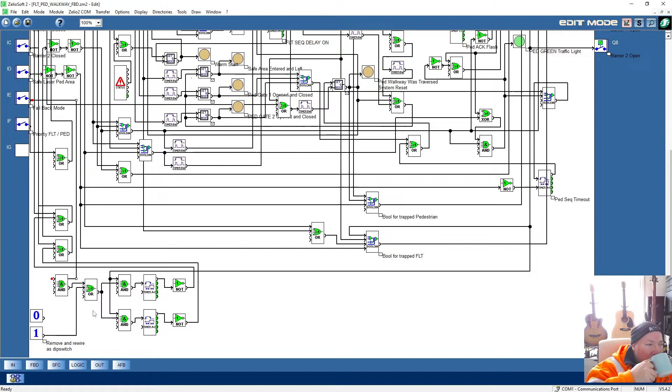Right, you ought to have a pill to make your brain work. I'm on statins and all sorts of stuff, so that's probably why my bloody brain's not working. They say it causes memory loss and all sorts. Oh well, what can you do?

Try harder, I suppose. I've just found one of my circuit boards. Right, anyway, leave that alone. Right, oh my god, let's get on with it. Let's get on with it. Bloody hell, get this done out of the way. Crikey. Anyway, so I need to override.

I need to switch the override on, but this switch needs to switch this on. So that or that, yeah. So let's take this off out of here. Unwire this AND gate, AND gate there. Put the switch into here.

Oh, I can't get it now. Hang on. Switch into there, that or that. And put that one back to there.

Right, so I've got this. Got the switch coming down to this OR gate. So if that switch is on or this is on, that's right. That's better, it gives me an OR gate. Right, so that'll do that bit, that'll do that bit.

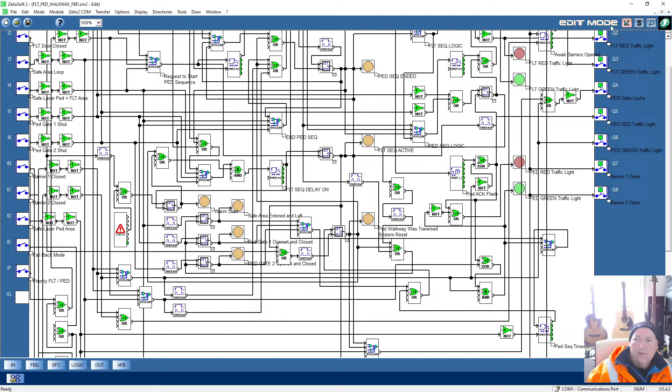So we've got to somehow override. Yeah, so we need to override them from our switch, from our fallback mode switch. Now let's just simulate again, let's find out what this is doing. So our simulator is allowing it to function without an input, but when we do have an input, it's a problem.

So we need to cut the signals off. So if we do that... right, the signals are going straight through. Right, I got you - so they're coming through an OR gate. Yeah, there's two OR gates, and it's coming through from there. They're both on from this at the minute. So we need to cut that signal off.

So how are we cutting this one off? We're sending the FLT door down here. Let's turn it off a minute. So the FLT door is coming down here to this one, and it's going straight back up again. Right, because then that's okay, because it doesn't matter if it's on or off, because this one is sending the signal based on this override here. So can we do the same thing?

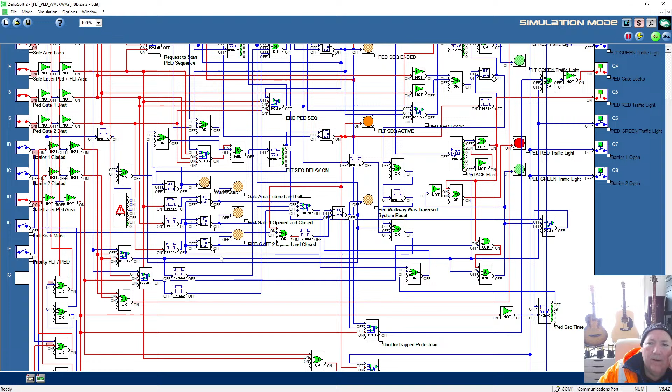Let's shut these up. Right, so it's going to go over to FLT mode. So your outputs are on and you're off here. So you're off, so it thinks the barrier's open.

Yeah, it's simulating it. But if you command press this on, it goes through and upsets the system. We don't need to upset the system. So we need to break those.

So we need to do this: when this fallback mode is on, it needs to cut this off. It needs to cut them off. Okay, so it needs to cut them off. So when that's on, it needs to cut them off. So they need to go - I need to signal off that with an AND to cut the signals off.

Okay, let's see if we can get it in. Right, that's why we need an AND. So barrier 1, barrier 2 is there. Barrier 1 is there. So that needs to go through an AND with the fallback mode.

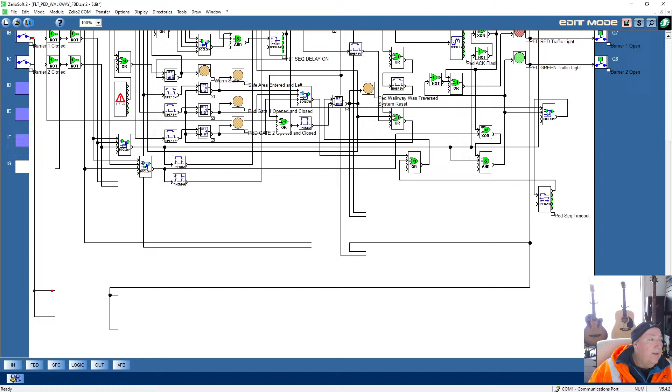Right, let's try it, let's try it. So let's put it straight into fallback mode. Right, let's put it onto that one. Let's see if we can go to FLT mode from this mode.

Are we counting down? We're not. Why aren't we counting down? Right, because barrier 1 is on. Yeah, we're counting down now. Okay.

Right, so we initiate a sequence. Yeah, so we're going through a sequence. Ped gates, and this goes back again. Oh, it's counting.

Yeah, so let's do fallback mode on. Okay, so we shouldn't have to worry about doors being left open. So fallback mode's on. Barriers are open, door is open.

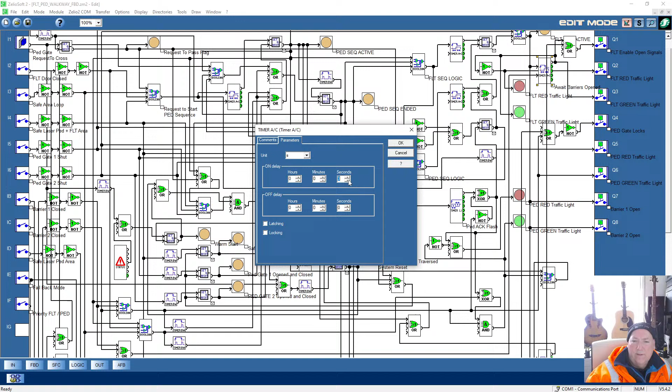Right, so we've got a 6-second timer here. Let's knock it to 3 seconds. Or even, yes, 3 seconds. Not sure why we've got a timer there now. We've altered something, might not need 2 timers. We'll leave it in for now.

Okay, so it's waiting for us. What happens if we switch fallback mode on? Should just sit there still. We...

Close the pedestrian gate safe area loop. And then it should, what about forget this one? Yeah, we're on FLT mode. We're on fallback mode, so I just press the button.

And regardless of what this one's doing, you just carry on doing it, regardless of what this one's doing, regardless of what this one's doing. Yeah, it's in that mode and it's timing out. It's allowing me 59 seconds to go through.

Okay, so if I go through, it's going to cut off the timer early, yeah, and go back to FLT mode once I've gone through. Yeah, looks good so far. Right, I've done a lot of tests, but that seems to be functional.

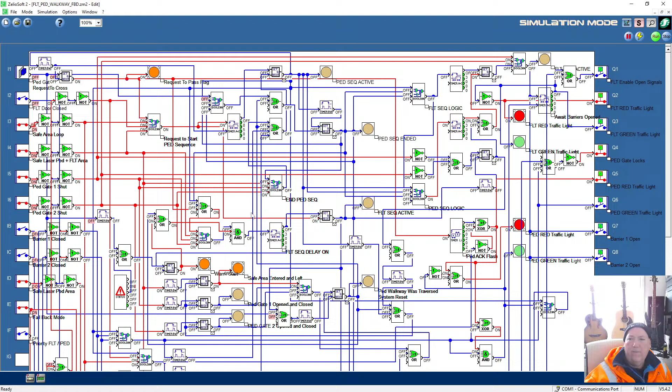Alright, so we're counting again. Let's leave it, let's watch it count out, see what happens. Right, so all we've got left to do now, apart from any problems or lockouts, is...

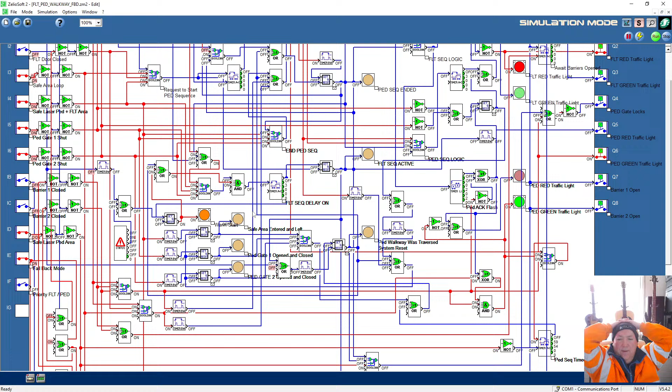Sort out the reverse procedure. That might not be so easy. Might not be as easy as it looks. That might be difficult, but we'll see. Now is it going to change back to FLT mode?

Okay, so let's just check the outputs. The barriers are open, the gate is locked, the pedestrian gate is on red, and the traffic light is on green for the forklift.

Enable forklift doors. So what we haven't done is introduce the flashing light if it gets barged. You'll only see that when you're on normal mode. We need to flash the red light every 3 seconds if we're in barged out mode.

Right, so let's do that before we do the direction. Okay, so we're getting closer, we're getting closer, so let's do the flashing light bit now.

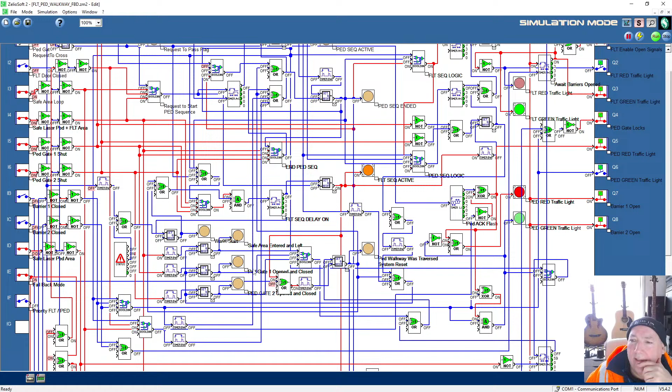Let's see how we're going to do this. We need the red light here to flash off. It can be on, which they'll be on, but it needs to flash off every 3 seconds for a second. But only if the mode is this one, so all lights flash off. So we need some way of making it flash when it's on.

Yeah, so we need a flasher. Right, so let's find a timer. I'm not sure which one we need. I think it's that one - cyclic timing, AC.

Exit set point - right, so we need that one by the looks of it. Let's just get this down here. Let's have this one. Let's see what parameters we've got - number of flashes, duration of flashes, continuous flashing. Right, so it's continuous flashing.

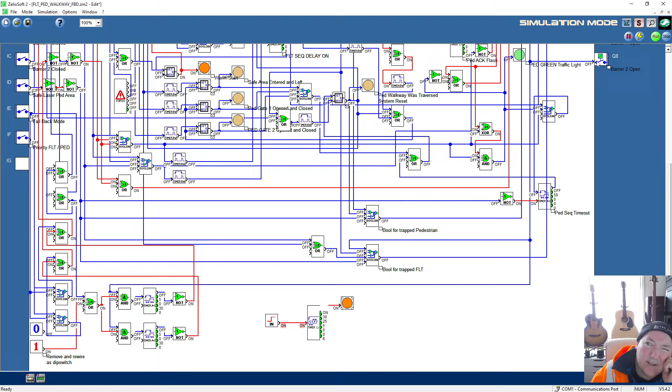It's only giving me 1 flash though, and I want 2 flashes. I managed to do that earlier, didn't I? Didn't I do that earlier? Let's see if we can get 2 flashes out of it.

Number of flashes, right, okay, continuous flashing. Okay, we can do continuous flashing, but it needs more than 1 flash. Right, how do I get more than 1 flash? So I want 2 flashes, but I want... How can I get 2 flashes?

Latching and locking. Yeah, I need 2 flashes. Right, let's just put in - so duration of a flash, it'll be 3 seconds. Sorry, number of flashes and duration of flashes.

Can I have one or the other? 2 flashes. Right, let's try it, see what happens. I think it's just going to give us 2 flashes and stick - that'll just give us 2 flashes and stay, really.

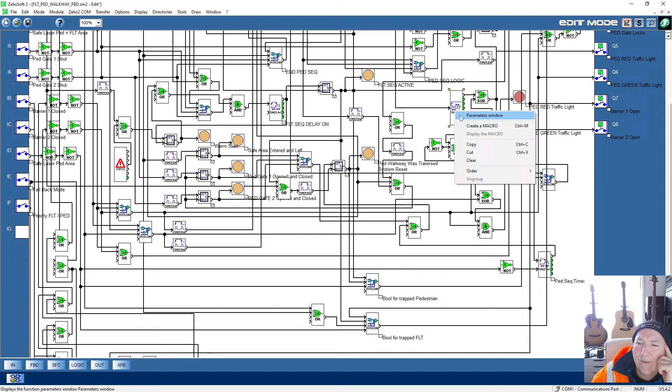0.1 second, so 100 millisecond, 2 flash. Oh, unit of measurement, 2. Okay, so it was 2, 2 and 2. Right, let's try that again. Let's try that again. So 2.

Yeah, 2 and 2, 2 and 2 flashes. Right, let's see what happens. So give that on, so we get 2 flashes. But that's the same amount of flashes. So I got 2 flashes from that.

Right, so I need to feed that back through another timer. Right, so we need another timer, a delay timer. So we need a delay timer. That one. No, not that one.

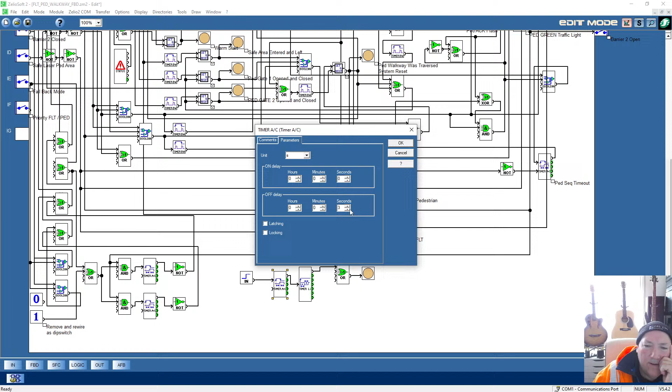Not sure an on delay, it needs to be an off delay, I think. What did we say it was? An off delay, right. Alright, let's try it again.

This used to be easy to work out, not anymore, right. 2, 3. No, that's definitely not what we want. We want it to come on. When you get a high signal, it needs to come on straight away.

On delay, no, we don't want it on delay, we want it off delay. So maybe that was okay. Try it again.

Right, so we want an on delay. So switch it on, we get 2 seconds. But we need 2 pulses. Right, so we're stuck on. So what's it doing now? Counting.

No, it needs to be an on delay. Right, so this is not good, is it? So we need 3 seconds before it switches on. Delay on, right, so we want a delay on of 3 seconds. And then we need to set something. This needs to be latching, maybe.

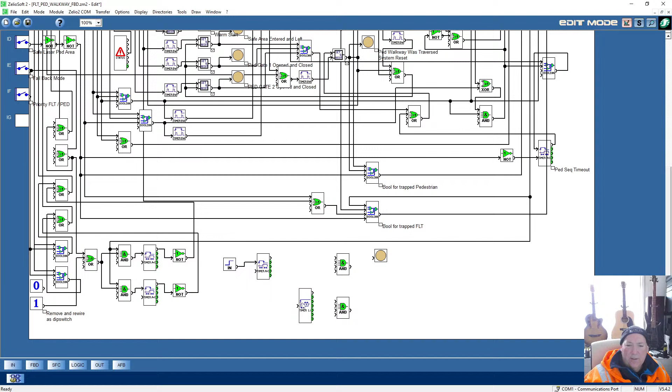So that's our delay on timer. Then we go on to our every 3 seconds of being on. So we want another one of these for every 3 seconds. Copy, paste - so another one of these for every 3 seconds. So delay on 3 seconds, and we want continuous flashing, and we want it every 3 seconds.

We want - okay, continuous flashing on time 3 seconds. No, we've got delay on of 3 seconds, then we want to come on. Yeah. An off time. Let's get my head around it.

So that's our delay on, an initial delay on before it starts to do the 2 second flash. So we output to there. It then does our 2 flashes.

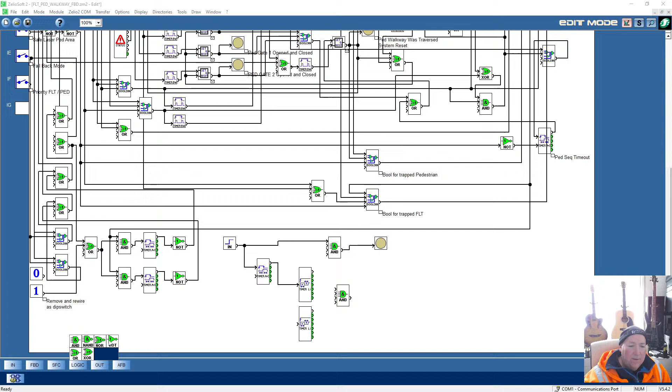Now I want 2 off flashes, so probably need that inverter back again that I got rid of. So inverter back again. Try again.

So we're off. Okay, we switch red light on. Okay, that's something like it. So it's stopped. We need a repeating one now.

So let's try it again. So we're on straight away. 3 seconds later, we've got 2 off flashes. And we need to repeat. Let's try it again.

Okay, so sometimes we've got to... okay, but it needs to repeat, doesn't it?

So we need to feed, if we feed that output back to the reset, what will that do? It'll reset off the first flash, won't it? That's the problem. We don't want to reset off the first flash.

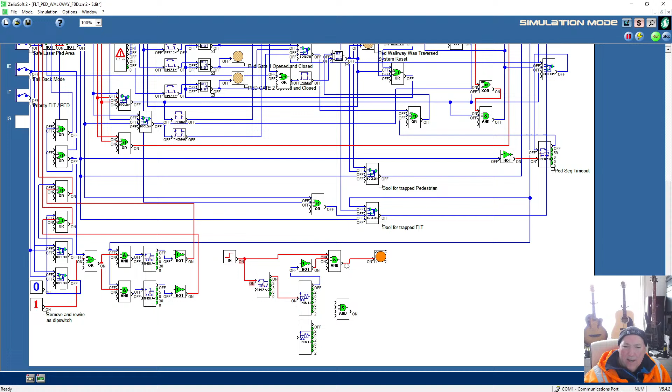So we switch on, we get 1, 2, 3, 2 flashes. And then we want 1, 2, 3, 2 flashes. But yeah, somehow we've got to count the 2 flashes. Now count the 2 flashes and reset the sequence after 2 flashes.

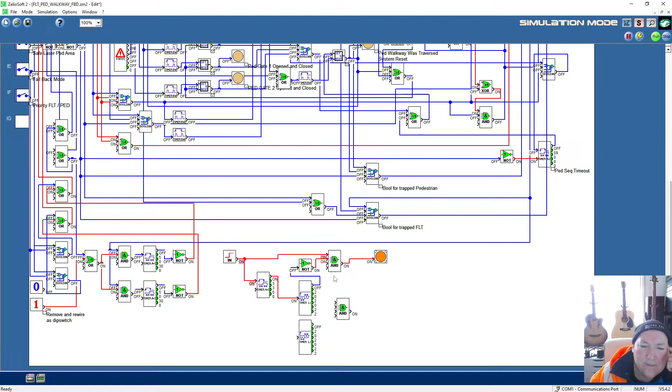What about if I did an exclusive OR instead? Now, I don't know if we've got a counter. Let's see if we've got a counter. I think we have got a counter. Where's the counter?

Up, down, counter. Seems it's crazy to have a counter. Up, down, counter. What's that going to do? Oh, it's just counting it. I don't need the counter.

Need something else. Step. Resetting it. Div. Step, a step, div or 2. Conv. Don't know. So I get 2 pulses. Pulse counter.

Have I really got to set 2 bits together? So I don't know how to do all that, do we? Must be one of these that does it. A bistable - what's that do again? I can't remember.

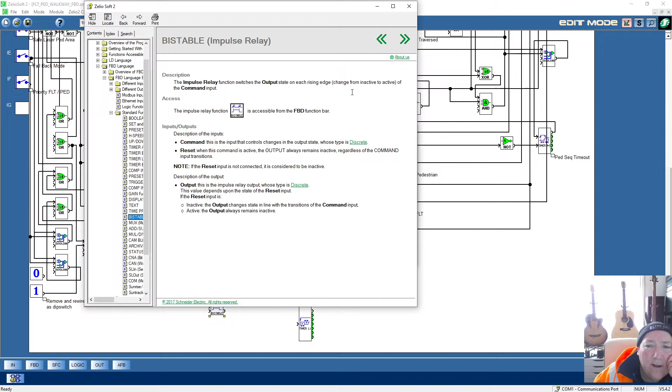Impulse relay switches the output state on each rising edge. Change from inactive to active.

Oh god, what do we need? So I need to reset then after two flashes. What's this offer us? Latching and locking. What's the difference?

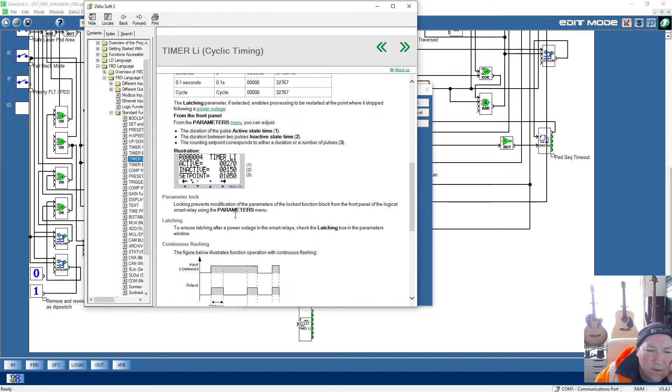Number of flashes, latching - ensure latching after a power outage in the smart relays. Check the latching, not bothered about that. Parameter lock prevents modification of parameters, right?

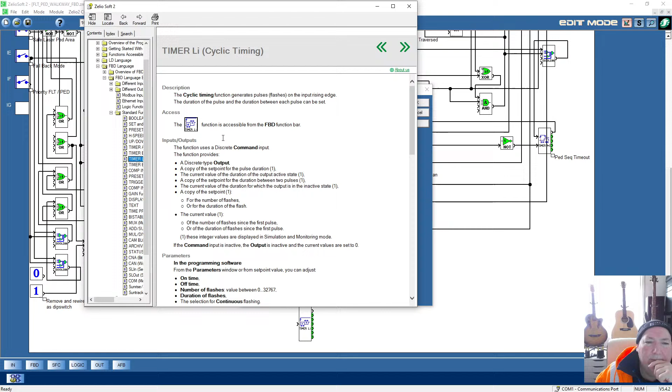Oh dear, right. Okay, so that's not really going to help us there. So no, if I get - I need two flashes before I reset the timer.

Unless we have a delay off timer. Yeah, maybe I could delay the off. So delay off - right, I need to change this to seconds and put that onto 30. So 3 seconds, and then we need to delay it off enough to do 2 flashes for

latching - does it need to be latching? I set it on latching, didn't I? Yeah, right.

Okay, let's try it, see what we got. Right, so switch that on. Alright, so 3 seconds - didn't see what went on then. So we switch it on. We got continuous, 3 seconds waiting, 2 flashes.

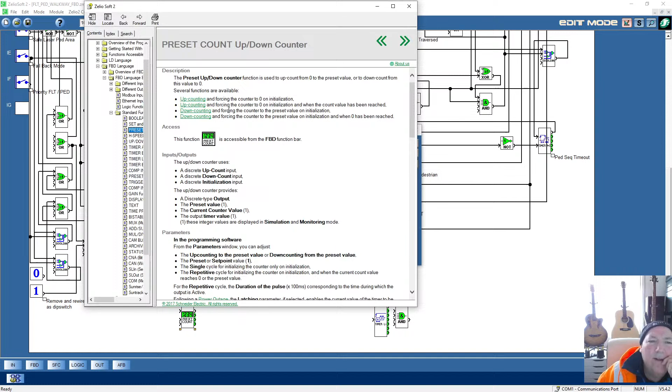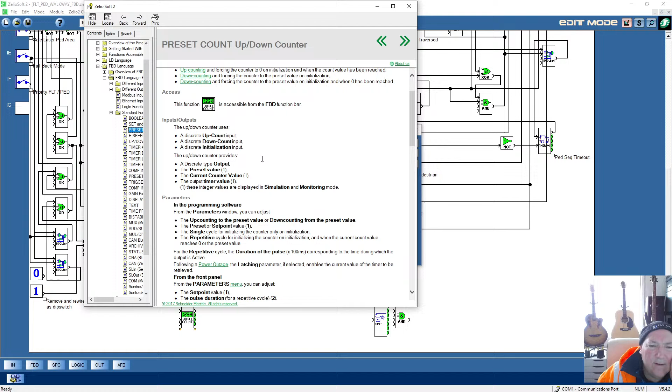So I could do it with 2 bits, couldn't I? 2 set bits. Alright, so I have 2 of these. So we come on here.

We have our first, it needs to go from off to on. So we need to go from on to off. Right, so from on to off, we get a pulse. Okay, so when we go from on to off,

these numbers are annoying, these block numbers. Is there no way to set them off permanently? Options - no. I thought I found a way of doing that. Right.

Oh my god, right, here we go. So we get an on to off - that's the first pulse, and it sets this flag. Right, which then sets the second flag. We need another.

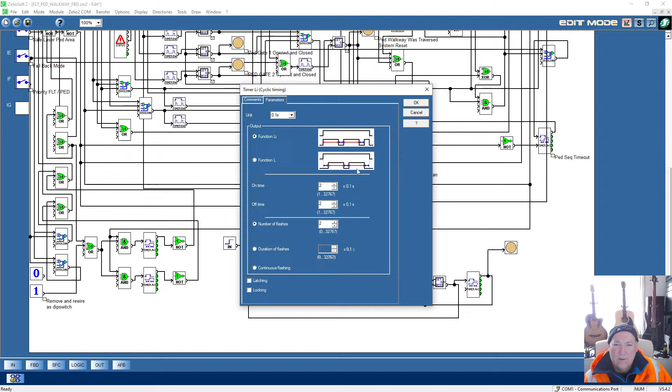Right, I'm gonna have to introduce some. What's this doing? Right, they're not long enough, are they? Let's just do that. This is not long enough. Should be, I don't know. Some of this stuff's supposed to be easy, but it's not.

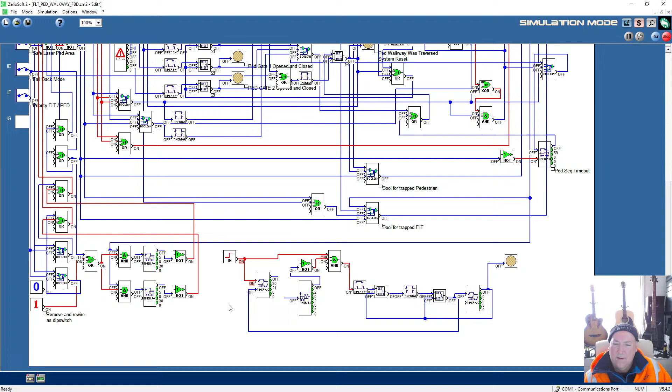I don't know what's going on. Maybe it's too fast for the visuals. I don't know.

Alright, let's invert it. Try anything once.

So it's still on now, isn't it? That's the problem, that's just not good. Right, so let's put it back where it was, put it back over here, connect it to that, so we're on straight away.

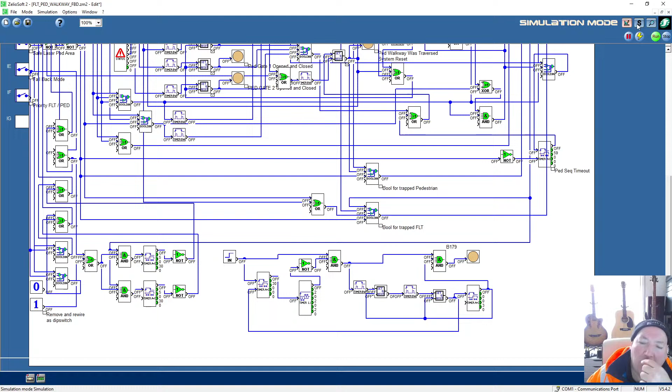Okay, so we need to be on. So we need an AND gate, another AND gate. Oh my god, how many AND gates do you need? So an AND gate, we go in from there, over to there, and this one needs to go into there. This is silly, surely there's a way of doing this without all this.

So we're not getting our flash, are we now? We're getting our flash on instead. So do we need to invert this one? Yeah, probably. Invert that one.

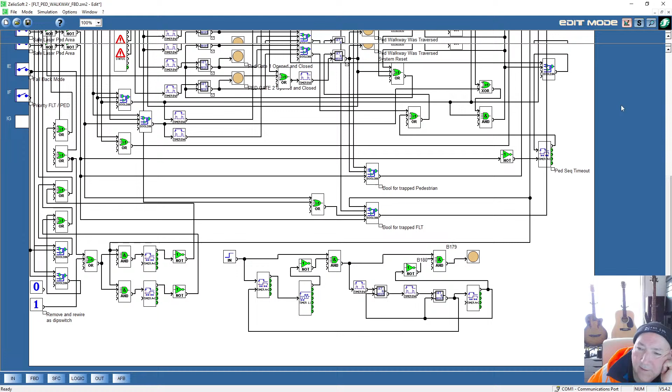Couldn't believe all this electronics to just do that one task. On straight away, off, 2 flashes, off. We're only getting 1 flash. We're getting a repeated, but only 1 flash. Although it did look like it was doing 2 flashes.

That's too erratic, isn't it? Too erratic, right. So what's this delay thing set to? Off delay.

So we're going from this being on, it's always going to be on. So what's this doing then? This is, okay, so we're coming in here, we want to be on, and we just want to flash it off twice every 3 seconds.

So a continuous flashing. Let's try something else. So go continuous flashing. On time, right, so on time is... alright, that's not going to do it, is it? Okay, so, crikey.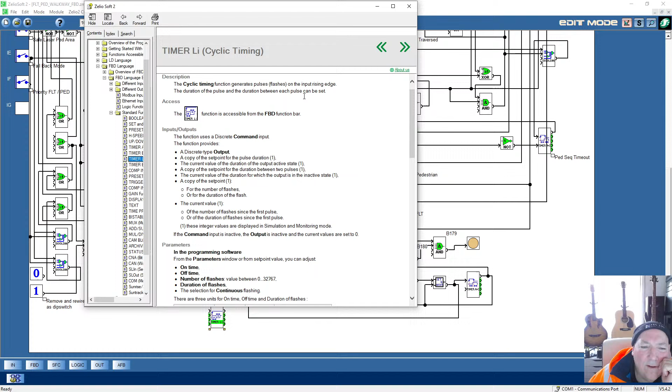Generates pulses, flashes on the input rising edge. The duration of the pulse and the duration between each pulse can be set. Where, units. Number of flashes, duration, continuous flashing.

Well, where'd you put your value then? Where can it be set? Not here. I don't get it, anyway.

Right, let's do it a different way. Let's think of a different way of doing it. So we've got our on duration.

And we've got our timer, which does 3 seconds. After 3 seconds of being an on delay, okay, so 3 second on delay, it sends a signal to this to do 2 flashes or continuous flashing.

2 flashes. Yeah, so do 2 flashes. Two flashes, yeah, that's okay. So we'll go through to this and it cuts it off, does what we want.

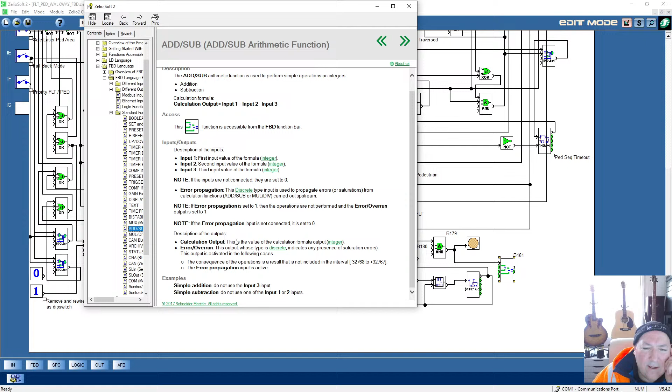Arithmetic functions used to perform simple operations on integers. Addition, subtraction, function accessible. Input 1, first input value of the formula, second input value of the formula, third input value of the formula. Error propagation, discrete, calculation output. This is the value of the calculation formula.

What the hell is this stuff, man? How do you get to function? Right, so we've got it there, and we're gonna reset that. If it, let me connect it, but

What the hell? It's like there's something not working. It's like there's bits missing. What is even that gonna do without nothing there? It's just counting, is it?

Alright, so it's just on straight away. What on earth is that? Someone's idea of a joke, isn't it? Surely. That's got to be someone's idea of a joke. The comparison, how do you compare?

Error propagation. Right, hang on. Maybe these aren't being used, so let's go from there to there. No. What on earth is that? Bloody hell, I've seen it all now.

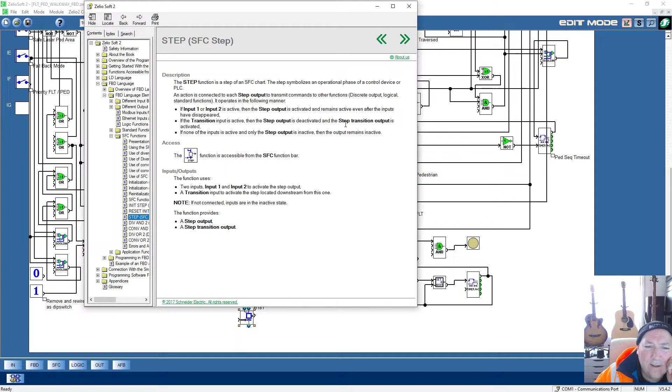What the hell's that rubbish, man? Not doing too well today. So I was hoping to get this.

It's only that last bit of flashing, and then the override. Shit. Shit.

So we've got our 2 flashes, and we need to restart it. I need to release and restart it. So what about if I break the connection? Forget about the restart.

So we use this on a timer. Use the timer to... Alright, so we go here.

So when this goes into here, and this has an off delay, so that outputs and it switches off.

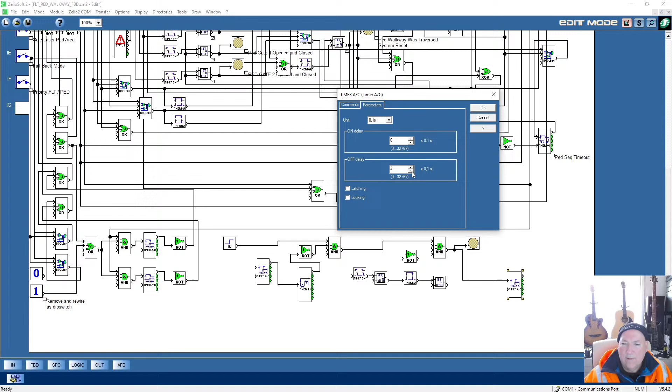So we have an off delay of 2 of them, and we put that output into there. What's this going to do?

Right, so that goes into there and switches the off delay on. But then we need that on straight away to trigger the off.

That needs to be through. Oh my god, can't believe this. Can't believe it, man.

So that's feeding into here through the output of that. So that will come through to there, but through an AND gate, an OR gate, an OR gate. Let's say it's an OR gate.

So we want that one into there, that one. Is it going to be an OR gate? That'll never change, will it, if it's an OR gate? It needs to be an exclusive OR gate, I think. Exclusive OR gate.

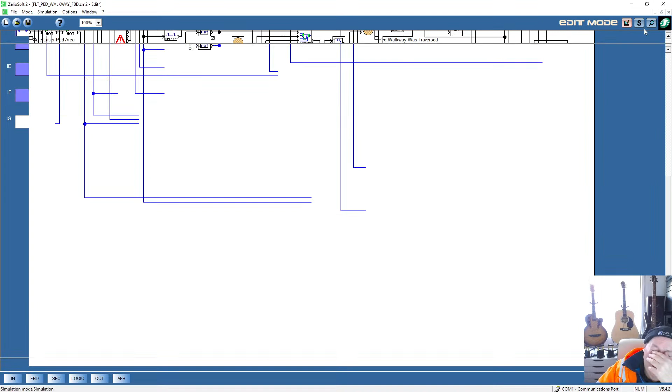Right, so we switch it on. Switches on straight away. 2 flashes. Right, and then we need to start the cycle again. Switch it off, switch it on.

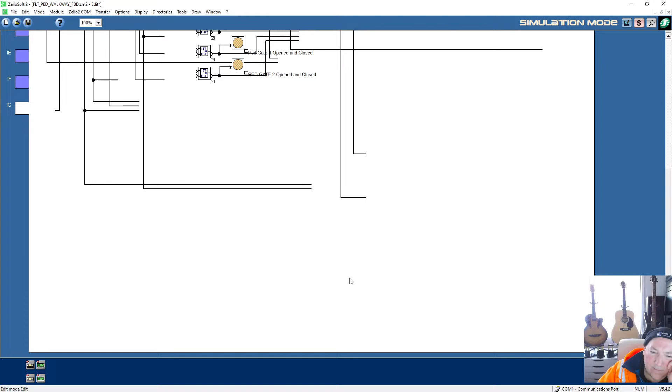So if I could do it manually, why can't I do it, 2 flashes? Right, after 2 flashes. Got 2 flashes and then it carries on. It resets the sequence, but only after 2 flashes.

Why can't I count 2 flashes? I thought I could count 2 flashes myself. Pretty sure I could count 2 flashes.

Right. So we got 1 flash on. So we go into there and we say when it goes from on to off, that's 1 flash. And this triggers. And we set a flag.

But then, yeah, that's not good. So we set a flag to, so we've had 1 flash. We've had 1 flash. Let's just put a thing there for now, bugger it. So that's our 1 flash.

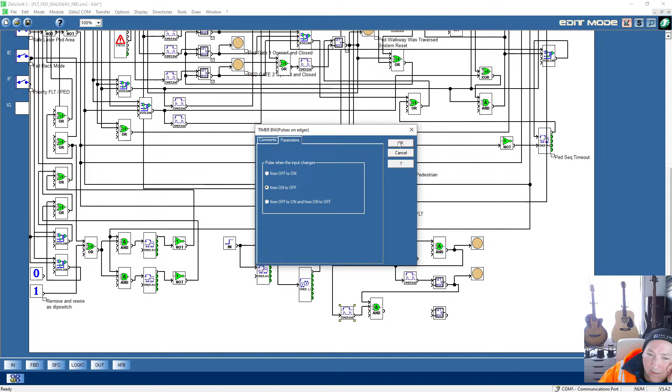Okay, so we've got our 2 pulses. No, because they're both going to come at the same time, aren't they? Right, that's not good then. But that has to be on. That's the first pulse.

Oh my god, it's almost impossible, isn't it? Almost impossible what I'm trying to do there. Fucking hell, excuse me, Jesus.

Right, so we don't want 2 pulses at the same time. We only want it after this, but that's an AND gate to switch this pulse on. Okay, so that it'll be ignored until that's on anyway. But then what, that'll be on at the same time as this, surely. So that when that's on,

need a delay, do it need a delay? Yeah, when that's on and that's on. Yeah, I can't tie that one in with the same input. And that'll never change when that output's on. Unless I can do it from when it switches off. So that one is from on to off. And this one is when it's from off to on. Which is almost exactly the same time anyway, it's pointless.

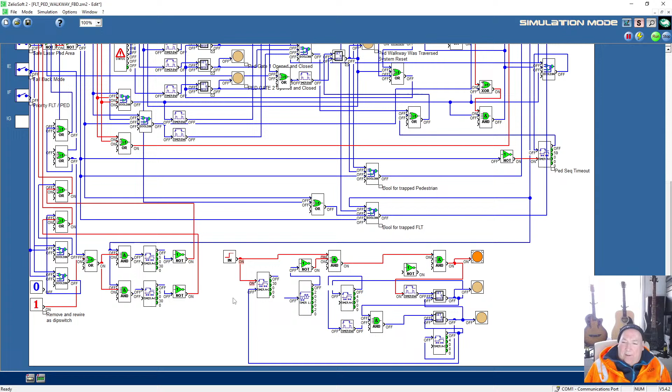Okay, so we've got 2 flashes and a reset. We seem to have a working thing. What a monotonous thing. So we've got 2 flashes, so we've got 1, 2, 1, 2, 1, 2, cascading. Yeah, that seems to work. See, that's all it needs to put a smile on my face.

So we got that. So really, we could turn that into, to get rid of all that, we could put it into a macro, but we'll leave it there so we can see it. Right, so switch it off, what happens? That's fine.

Right, so we don't need the indicators here. Let's tidy this up a bit. Let's make it smaller. So let's sort this out. Right, let's sort this out. Okay. Right, yeah. Let's get rid of this bit. That can go down here. So it can go over here. Okay.

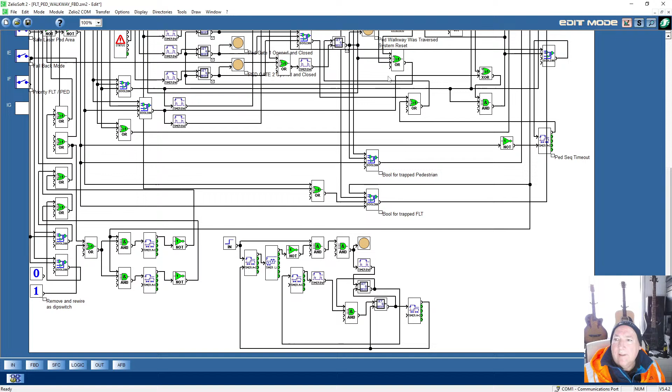So what we haven't got is a way of overriding the system at the minute. I don't want to work on it another day, I want to finish it off. Right, let's just save it and see what we've got. Alright, so we switch it on and we should have a way of flashing it twice. We need to integrate that into our flashing system. Right, we're going to need a toilet break. So back in a minute, see you in a minute.

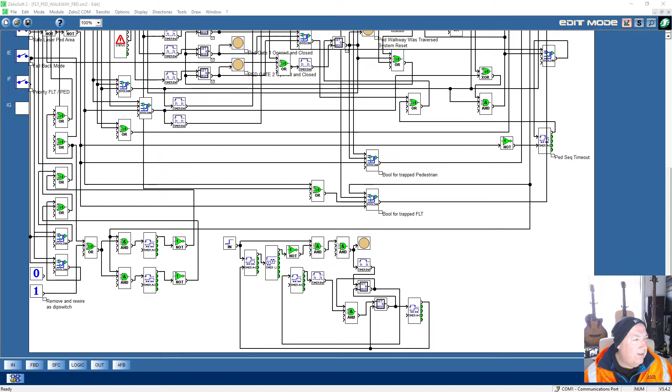Back again. Right, have a biscuit. Sitting down here is not good for the health, you know. Sitting still for too many hours, not very good. Didn't go swimming this week—mate called in, normally go Sunday. We didn't go for the first time in about 2 years. But anyway, we shall have to get back on it this Sunday.

Right, so I'm just trying to make this into a smaller area. Let's get this into a smaller bit of an area, just to make it more compact. Just make it, it's too much, you know, too much, what do you call it? That can go there, can't it?

This is the problem with this program. You do have to mess around like this, trying to get your space back. Right, so you just got to keep it compact if you can, without losing sight of what's going on with it, if you know what I mean.

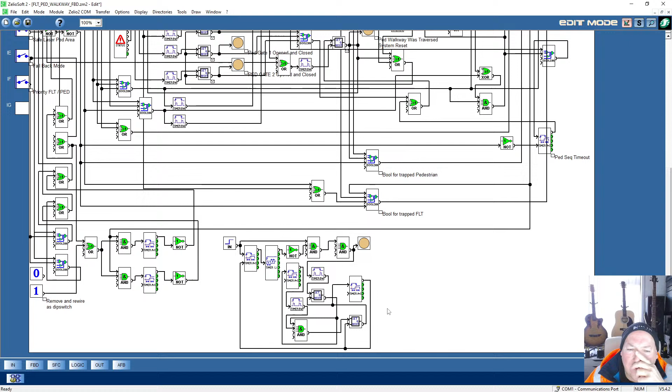Right, so can we put this up here out the way? Right. Okay, sort of. Right, and I got this one to get out of the way. Okay, another one. Okay, so we've got a sort of a square going on here, almost.

Let's bring these down a bit so we can make some room for this button. Let's get this down in one square space, if you know what I mean. Trying to limit, keep the real estate into a manageable area. That's still readable.

Okay, that's not so easy, but yeah. So we've got a nice square going on, almost. Yeah, so we've got our input and our output right there where we want it. And we've got a lot of waste here, but don't know what else we can do about that.

Maybe we can get rid of that to there, sort of. Maybe we can line this up a bit better now, and that one too. Not really, we've lost something there. Go over a touch.

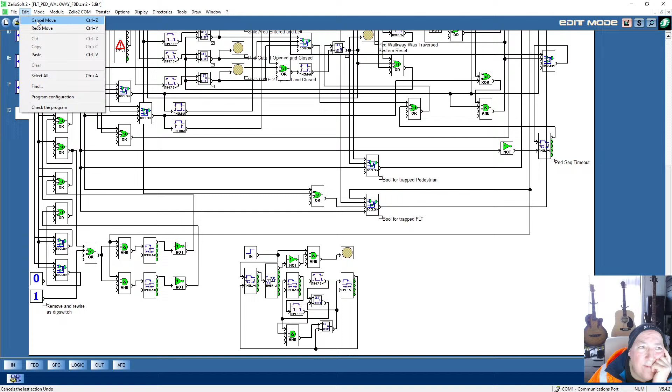Cancel move, cancel move, cancel move, cancel move, cancel move. Control Z, control Z, control Z, control Z, control. Ah, see that bit there? We removed that and we lost that.

So we need to restore that. Right, let's control, redo move, control Y. So let's do control Y. Control Y, control Y, control Y, control Y, right up until the last. Right, and we just need to put the output from here over to there. That's the bit we lost.

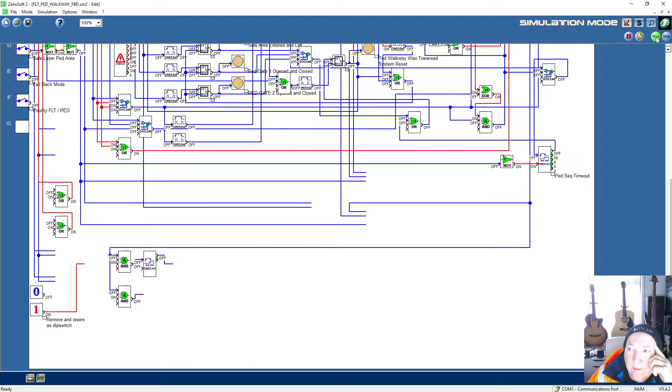Okay, right, so we've got that. Let's see if it works this time. Give it a signal. On, 2 flashes. On, 2 flashes. On, 2 flashes. Right, so we've got a way of making that come on and off.

Tell you what, it's a shame about that there. Right, we've got a way in and out, that's okay. Waste of space here. Let's move that down here. Move that there. Move that over to there.

Let's go on there. Let's put that back there, and this one back here. Right, so we could come down another one. What's that there? Why has that gone crooked? Come down like that. This one needs to be altered somehow. Not sure what's going on there.

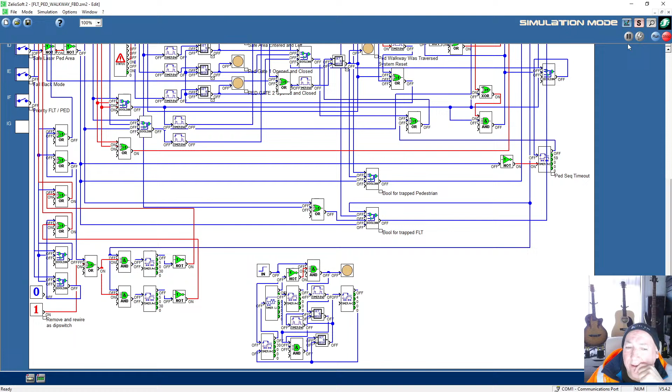So we've got ourselves a little flasher circuit which we can use if we want on different applications if we ever need it. So switch it on. Yeah, we flash on and it keeps going on as long as... switch it off and it goes off.

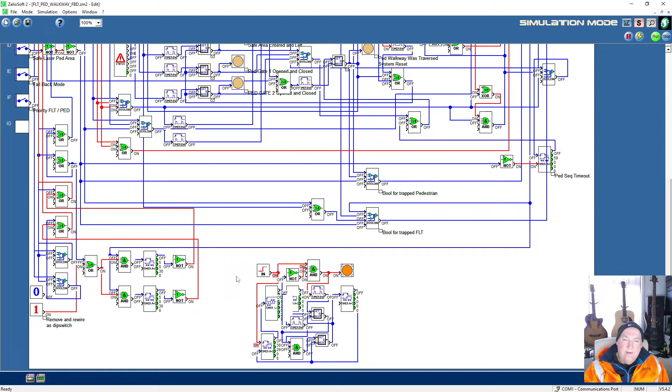Right, so to make that flash something, it needs to go in with something. So in order to make that flash with a circuit at certain times and not always, it needs to go in with the red lights, but only when a certain condition is met. So those red lights need to come down to... yeah, so I need an AND.

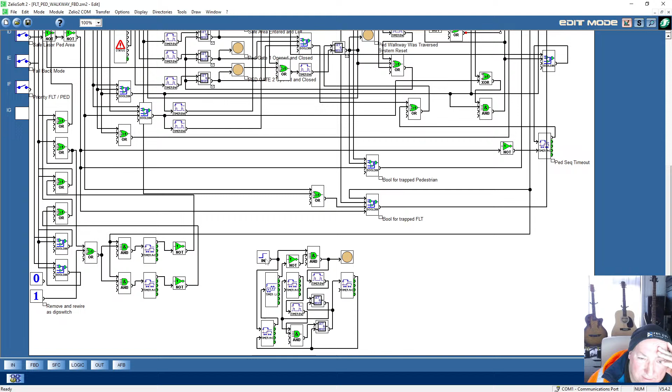I need that red light feeding around to the back, feeding around to the start input here. So that needs to have an OR gate. Or we need to have a start, an input. So we need, probably need to replace that. No, we can't just take it out, can we? It goes to there and there. Right, so we need an OR gate. So I need an OR gate.

Yeah, so either one of our red lights. Yeah, so we need to flash both of them, all of them. Right.

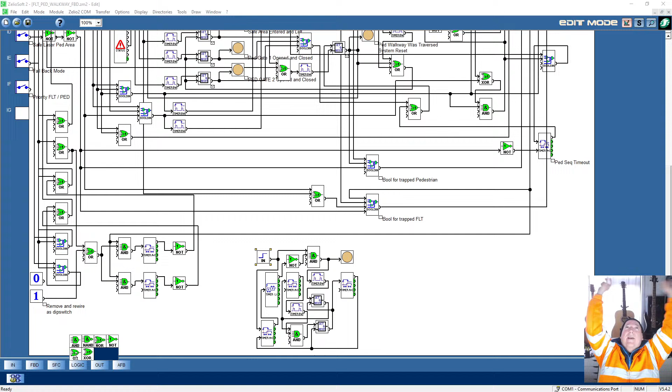Nightmare. So we've got that almost done, the complete 2 bits, there's 4 bits. There was the fallback mode, there was the flashing light. Yesterday there was the safe laser Ped area, and we did the FLT safe area. So that's almost 4 things. We've got one last thing: the priority FLT switch over. That is what we've got next.

So we need an OR gate on this, just so we can take that out of the system. Take that one off, take that one off, move that out, put that in its place. We need to go OR to that and OR to that. I think it was that one.

Alright, and we've got a bit of a how-you-doing here. Alright, that's sorted that bit out. Okay, so yeah, we can bring that down one. That's our input, so we can have our test one going into there. Let's just put it into that bottom one so it's out of the way.

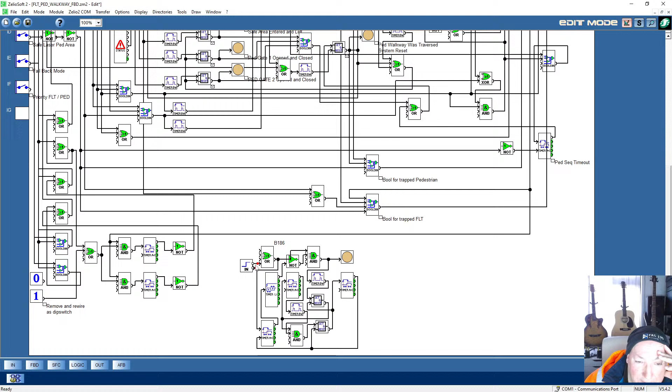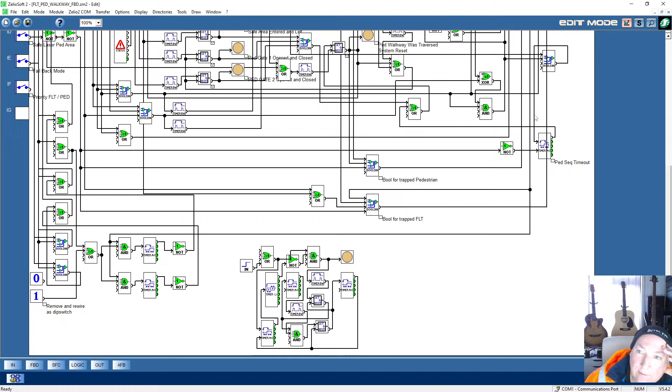So we've got our OR, so we can bring our OR into there. Our output, we need to, that's our switch on. So we need the red lights coming down into here. Can that be moved? Possibly can be moved there, yeah. Give us some space. Right, so we need our 2 red lights now coming down into here.

But they need to be OR'd. Exclusive OR, is it? Yeah, we need an exclusive OR. So when they're at logic 1 and in a certain condition, they need to flash. So that needs to be on.

So we need to have an OR gate to switch them on. Now the problem is it needs to flash them off. So we need to intercept. This is another problem. Yeah, another problem. We need to be able to selectively switch them off, but not directly control them totally, but only when a certain mode is set.

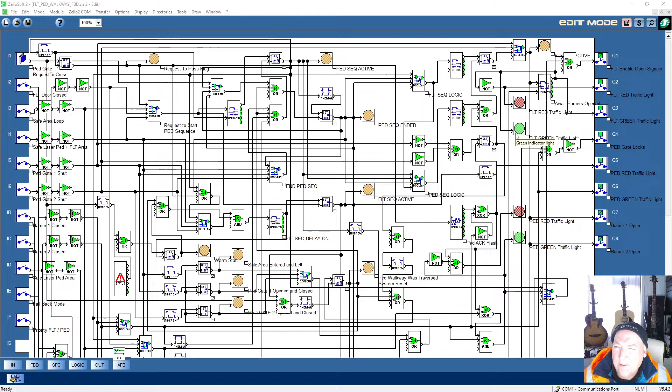So if that's permanently lit and we've got an exclusive OR, so if the other one's lit, it takes that one off and doesn't allow it through, and then I take over the flashing. So we need an exclusive OR to cut the signal off, and then we'd re-establish the signal back again through my thing. So we need a bit of space up here for an exclusive OR.

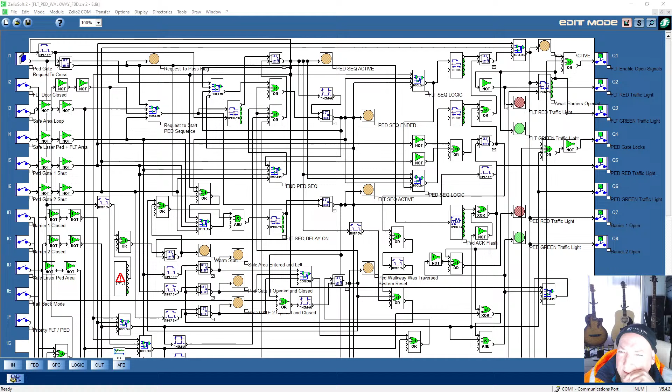But we've got an exclusive OR, and we've got to come back, bring that down. Yeah, so it needs an exclusive OR to pass it through. No, it doesn't pass it through, does it? Does it pass it through? No, it passes it through when the other one's off. And when I put the trigger on, the state flag on. Right, look, we can make a switch.

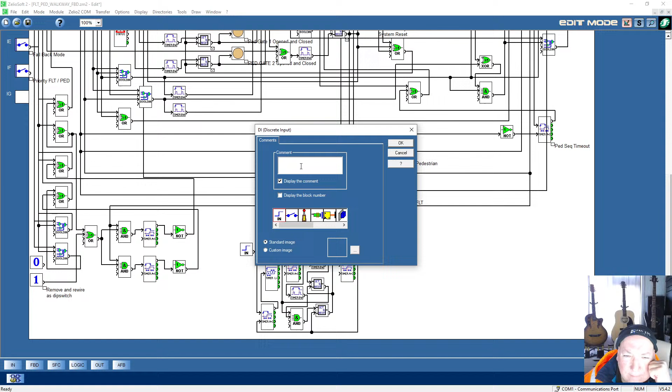So let's have another input, we'll call it... right, so we're going to call this a test XOR. No, it's a gate isn't it. So test cut-off gate. Well, I can't use the word gate. What is it? Cut off gate. Right, it's going to be confusing. So we have that. We have an exclusive OR. We'll need two exclusive ORs.

Okay, and the other side goes up to the flashing light. So when this outputs flashes, it'll have to be inverted. So we want when the flash comes on, it cuts off the signal, but it's going to then light the lamp up, one or the other. It's going to light the lamp up. But with F both on, you won't get an output. Not sure. Tell you what, let's try two of these and then just try one. See what we get out of this exclusive OR.

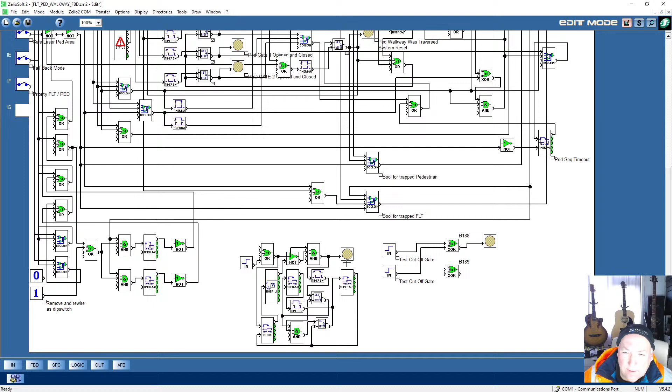Right, let's try that. Let's try it, let's just try it. Let's see. So we want, we've got to pretend that's our light. Let's put the output to one of these. It won't let us. Let's put the output from there to there.

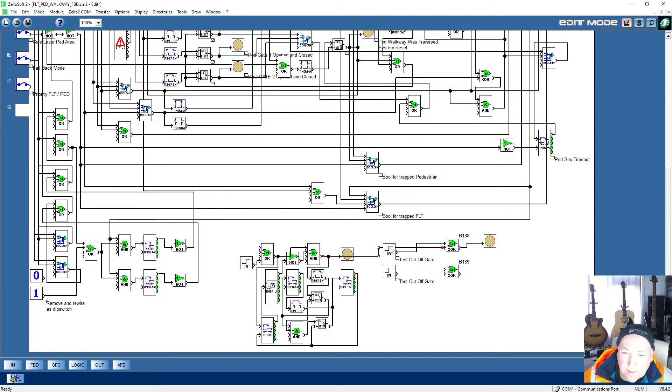Right, okay. Right, let's clear these parameters. So let's switch this on over here and see what we get over here. Right, so we're coming on. The light's on. That's a normal signal.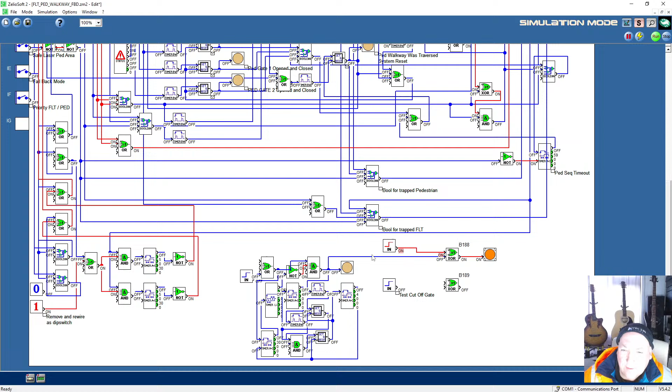So that's on, and we want to override it with this one. So we're off when we should. Yeah, we're doing the wrong thing, aren't we? So we need to put an inverter in there, which might cause us some issues. Might cause us an issue when we're not on. That's the problem.

So let's have a look. So we're on, see, we're not on now. We're not on now, and we're on. Right. So we're on when we're off, and then that's on, and that's on, and it'll flash off. Yeah, it's doing that when they're both on.

But when we switch that off, it's still flashing. Turn that off, and it's lighting that on continuously. It's not what we want. But we need an AND on the back of here. That on, and yeah, so it only flashes. Right, let's put an AND in it.

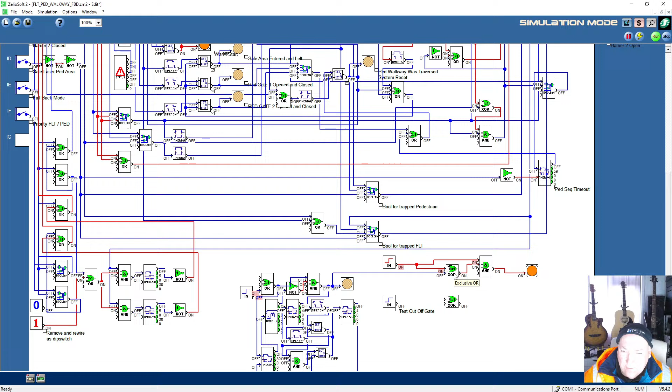Right, so turn that off, turn that off. So we're off, we put that on, we're on. And we're both on there. It's an AND gate. Okay, so we might not need the exclusive OR, we might just need the AND gate. Let's try it. Let's get rid of the exclusive OR. Let's just put this into the AND gate.

Right, let's see what we've got now. Right, so we switch it on. We've a problem now. Right, so maybe we didn't need the inverter after all. So we put the inverter on in there, over there, switch it on to simulation.

So we're not outputting. We switch on, we're outputting. We also switch this on if we got error. Alright, now we're flashing the wrong way around now. Alright, why are we flashing the wrong way around? I see, so we're flashing the wrong way around.

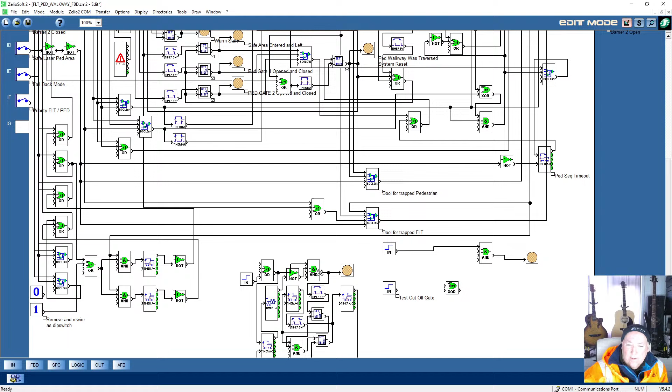So what happens when we lose the inverter? We've done this already, let's go back and lose the inverter. We're not going to get the output we need. So we switch that on. We've got no output, but these will switch on.

No, it's fine when we do that. Yeah, it's fine when we do that. When they both come on together, it's fine. So what we need is to bypass the AND gate when the condition isn't met.

So when the trigger is not on, we need an exclusive OR, but only to bypass. That needs to go through to there, but be cut off. Exclusive OR.

So that's your light, traffic light on. We need a signal to go in with this to cut it off. So let's put that there with that, and that goes up to there. Let's see if anything happens now.

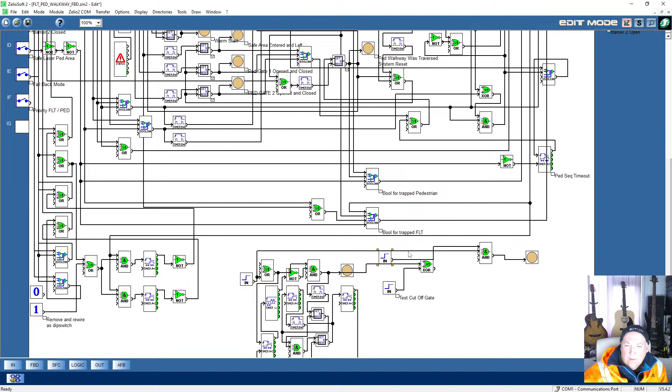Right, so we need to get rid of that one. That always goes through to there, but only when this is... can we do that? Yeah, so we need to. Right, so I need to do that. Bring that down a touch, bring that up a touch.

Okay, so when that's on, right, so when that's on, right, we're into overtime now. Oh, God. Right. So when that's on, it lets it through.

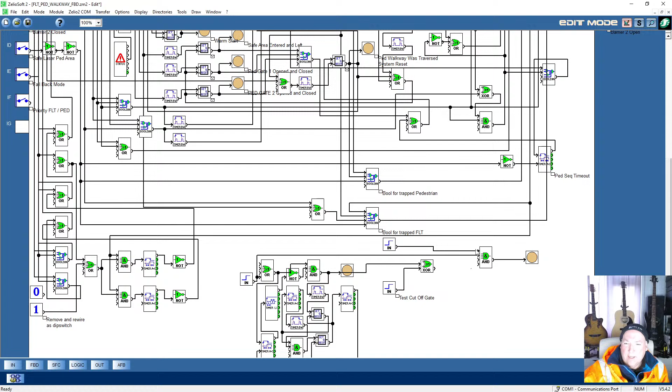No, that's not gonna let it go, is it? That's not gonna let it go because that'll be off. Right, so it needs to carry on. Right, it's not gonna do it. Why have I got a headache? Always not a physical headache, an actual problem near time to knock off when I need to finish it off and leave it in a state that that part is complete. Right, so that's not going to work.

So the input is on. Oh, it needs to be a bool, doesn't it? Yeah, so if this is on, it needs to cut this off because this is taking over. Right, so it needs to be a bool, not an and. Right, let's do a bool then. Right, let's do a bool.

Okay, so the signals need to go from there to there. Right, now that needs to go straight through if this one is off. If that one's off, right, if this is off, I don't know, let's go down a bit. If this is, so that needs to go straight through to there and light that up. If that's off, that's on, it needs to go, let it pass through.

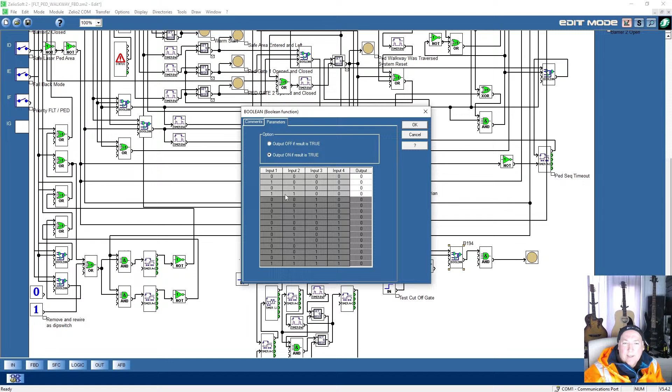So it needs to be a 1 0. 1 0, it needs to pass it through. And then we need to cut off the thing. Yeah, so if it gets a signal into there. Right. So that'll let it through. If that's off, it'll let it through. If it's on, it's not going to let it through, so we need to take over.

Now that needs to be not an and anymore, but an or. Alright, exclusive or, don't need exclusive or anymore. Let's take that off. Take the exclusive or off, or leave it there for a minute. Get it out of the way for a minute.

So that needs to interact with, that'll output that, but needs an or, does it need an or? Let's try an or, does it? It won't need an exclusive or anymore, so just an or. So like that goes into there. That won't output. We could just as well, I'll try that into there, just to see what happens. Might have to get rid of this. Right, let's try again.

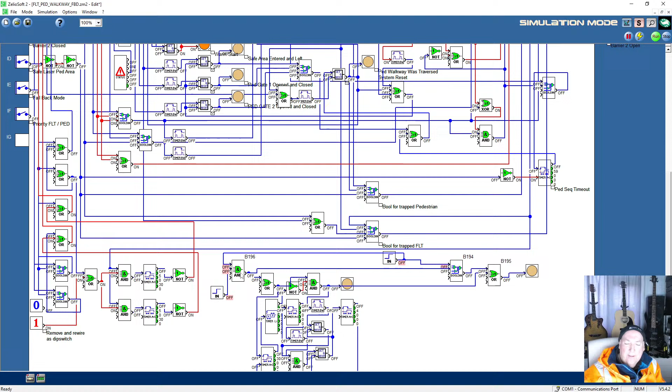Right, so our state, how do we incorporate all this now? I had a nice little package here going on, nice package there going on until I did all this, but we can get rid of our OR gate. Let's get rid of the OR gate. So where are we going with this OR gate?

We've got one there and one going to there, that inverter, so one to the timer and one to there. So let's get rid of, let's chuck that off. Put this down to here. So we need to go, one goes over to there and one goes over to our timer.

Right. Okay, so we've restored that sort of. We've got a weird setup going on here. Come back a touch. Okay, so we've got that there. Okay, so that's all right.

Is there a way to get rid of this thing? Right, this is not part of the signal, although it is. Yeah, it is, it's gonna have to be combined at some point. Not sure when though.

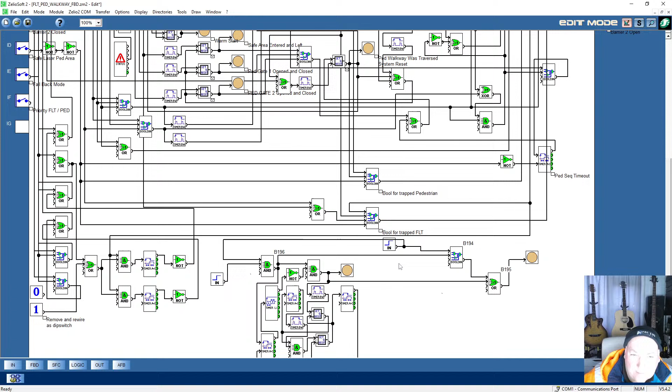Right. So that's no longer our real signal. That's our three flashes, but it goes through this lot. Right, this is crazy.

Right, let's bring this over here. Alright, okay. That's okay. Alright. Okay, get rid of these block numbers.

Alright, should be working now. Probably now. Nobody's going to be paying me for this. Alright, so that's part of this now. Let's see if it still works.

Right, so click that on. We've got our traffic light on and off. We take over the traffic light, cut it off, and we have our flashes.

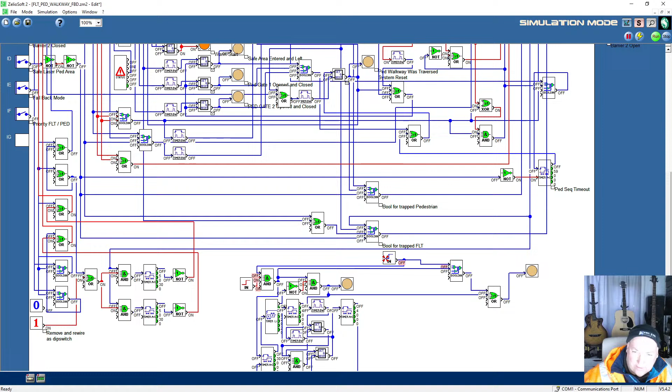So that's an OR gate with that, and that's giving our flash. So we turn it off. Oh, we switch off the red traffic light. We lose the red traffic light. Put it back on, we've got our red flashy going on. Turn that off, just got our static red traffic light.

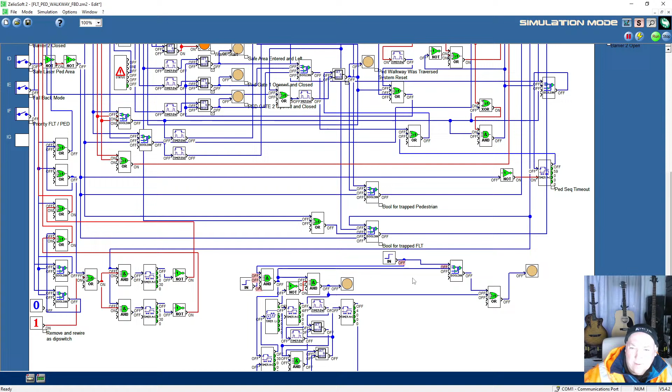Okay, so we've got 1, 2. That seems to be it. Red traffic light flashing, turn it off. Yeah, so we've got it enabled, but it's not getting our trigger over. That's okay, that's what we want, so that seems to be working. Let's save it. It's not doing anything at the minute, not integrated into the rest of the circuit, so we'll have to do that tomorrow.

Now we've got a traffic light. Does this need to be part of this? Yeah, so the original traffic light and the output, this all needs to be part of this really. But that's just one traffic light. We've got two separate traffic lights to interact with.

So we don't want to, we're directly interacting with that. So we need to keep this separate and double it up to do an OR gate because we've got to separate the light. Yeah, so we can't integrate that with this. So we need to double this up again.

Right, let's just copy all that and paste it. Bring it down here so we know for tomorrow. Right, let's bring it down out of the way a bit. Right, so that's our other input for our other traffic light. We need to bring the flasher, which is going to flash all the lights anyway, together. Right, so we need to bring that there.

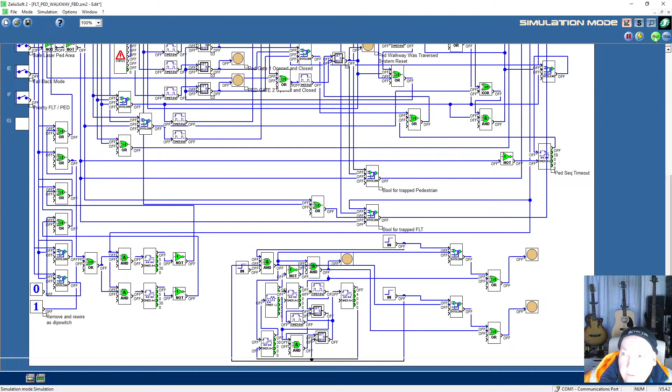I don't know, let's try it. So go over to there, to our AND gate. I'll try that, I'm not sure what's going to happen here. So we switch that on, we've got our traffic light on. We switch that on, we've got our traffic light on. Switch one off.

Switch on the error signal. No, we're not getting it now because we've not got this one on. But they will be on. And will we get a flashy? Yeah, they will both be on at once, but they need to be independent. So that's not altogether a problem. If we switch one off, it switches them all off.

But that's good in a way. Let's switch that off, as long as we've got a permanent light on. Right, we've got our thing on there, so that switches up. When they're both on, they'll flash. Switch one off, they won't flash, just stay on. That's okay actually, that's alright. As long as you've got independent control here.

So they have to be both on, and that has to be on for it to flash in the error mode. If you switch that off, you just got the permanent lights on, which carry on triggering. I think that's a good place to leave it, good place to leave it tonight.

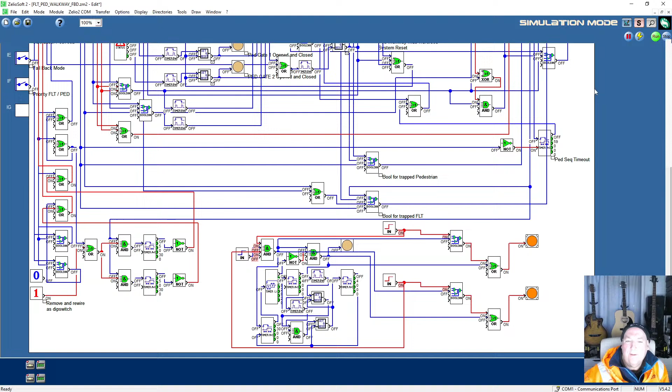Right, let's save all that, and we're actually done. We're done for the night, and that's took nearly half an hour longer than I thought. Well, didn't really want to stop at 5, but anyway, what can you do? Anyway, oh, it's all dark in here, the light's gone.